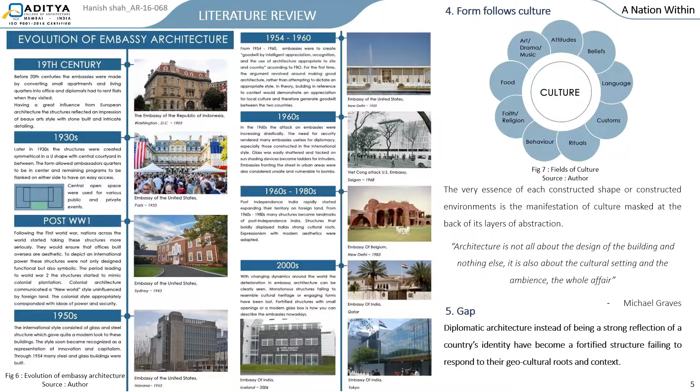Case studies were done to understand the functioning of these diplomatic structures and how they can create a dialogue between the host as well as the native nation.

For example, the Embassy of the Netherlands, designed by architect Rem Koolhaas, used the history of Berlin to create a dialogue between the built form and the context. The Embassy of Belgium, designed by a sculptor rather than an architect, treated the diplomatic structure as a monument rather than a formal structure. The Embassy of Finland used the geographical location of the nation to create a meaningful design.

The Embassy of India in Malé was studied to understand how the residential and chancery blocks are interdependent and function cohesively together.

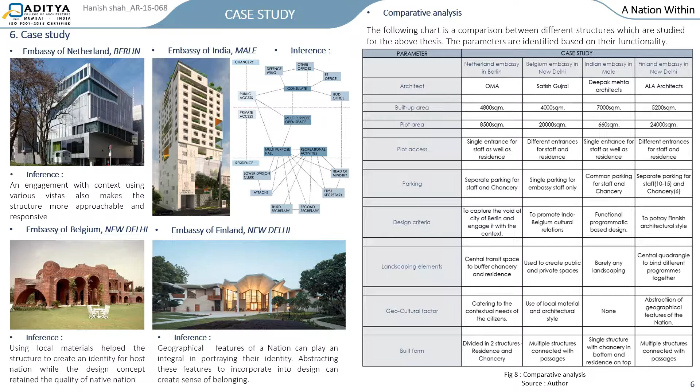The site was selected considering the new budget released in 2019, which suggested the construction of many new embassies. Further shortlisting was done considering a country with rich historical, cultural, and economic ties with India.

My proposed site is in Jeddah, Saudi Arabia. The reasons for this site selection were the Islamic religion, one of the most important religions in India, the huge influx of people traveling from India to Saudi Arabia, and the revised Middle East policies.

My major stakeholders were Indian diplomats who are going to stay there, visitors who are going to actually use that space, and citizens who will be onlookers visually experiencing the space.

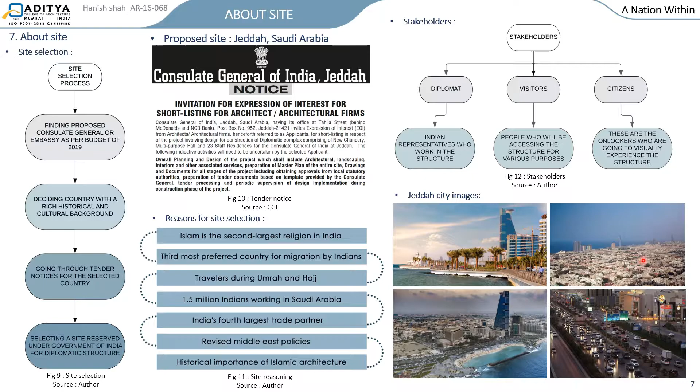The Jeddah city images show that along the west coast there are mostly high-rise structures, while once you come to the core, most of the structures are low-rise.

Jeddah is situated right next to the Red Sea, and hence the climatic condition in Jeddah is not as extreme as the rest of Saudi Arabia.

My site is situated in the residential zone of Jeddah, in proximity to the main airport and the main dockyard. The climatic zone in Jeddah is tropical arid, and the hemisphere is northern.

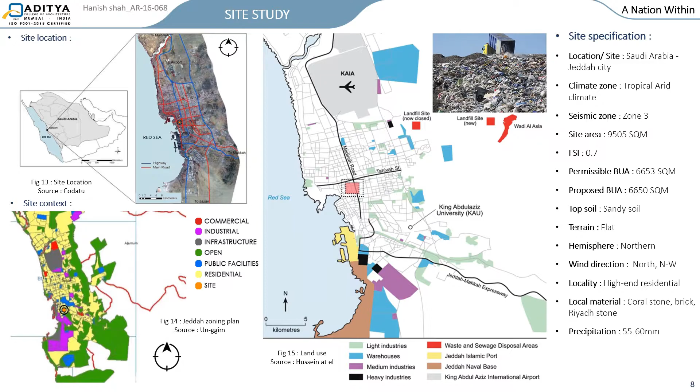My plot is reserved under Government of India for designing an Indian Consulate General. The area of my site is 9,506 square meters and it's almost squarish in shape.

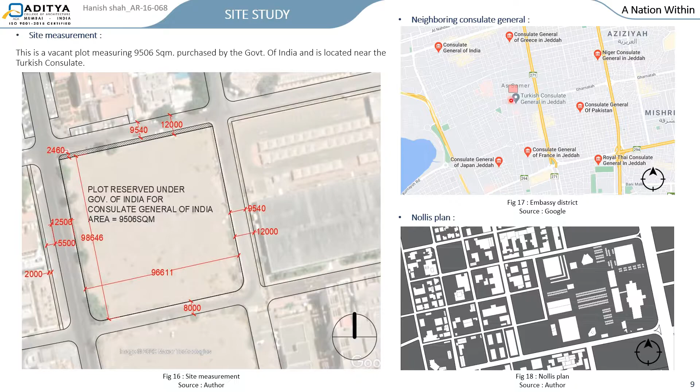It has roads on all four sides and is situated in the Embassy district of Jeddah. The Turkish Consulate General is at the closest proximity from the site. Majority of people access my structure via the main highway, denoted in red. Considering the road hierarchy, the road along the west of my plot becomes the main access road.

In context, the north and northwestern side majorly consists of residential zone, while the east consists of office buildings, and the plot right next to my plot is an open space. On the south is my Turkish Consulate General, which can be seen from my site.

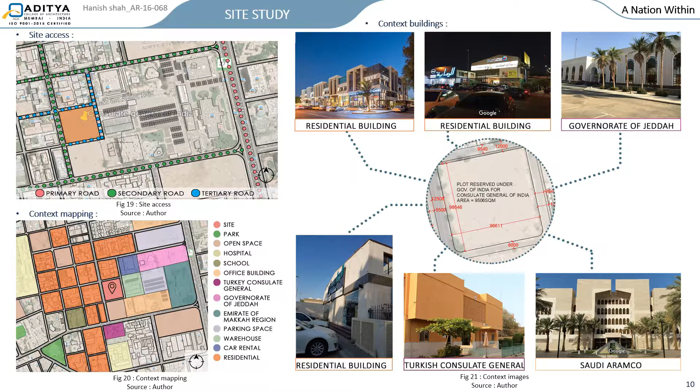As seen in the context images, majority of my structures are G+2 and G+3, all in a beige tone. Due to the height restriction, my viewport is restricted within my immediate context only. The site is devoid of any existing vegetation. A material study was done to understand and create a more contextual and sustainable design.

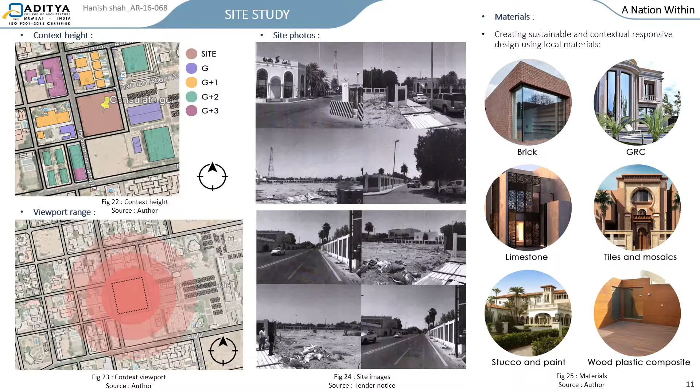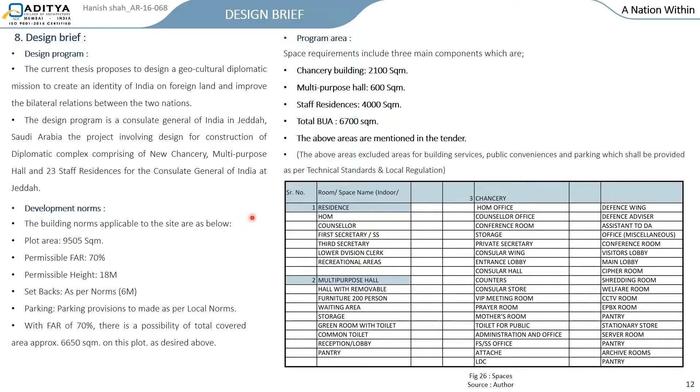Now, coming to design. As I wanted to create a geocultural design reflecting a nation's identity, I started thinking about how people actually perceive India. That's why I stumbled upon the identity of tourist paradise, which India was given because of its magnificent beauty.

The idea was to capture this beauty, this paradise, into a built form by conceptualizing the peacock, which is the national bird of India and also one of the most beautiful birds in the world. In Islamic culture, peacocks are known as the guardian of paradise.

Below are my abstractions from the peacock, and the last one is an abstraction in a planning way, done by conceptualizing the feather of a peacock.

Then I started thinking about how I wanted my context to perceive my built form. India, which believes in mutual harmony rather than dominating, I wanted my built form to complement the context rather than overwhelm it. I started differentiating between Indian and Islamic architecture using the play of arches.

Indian arches are usually semicircular, while Islamic arches are usually pointed. As I wanted to create a more engaging design, I still had to use passive strategies to create a secure design. Hence all the accesses are placed indirectly so a person can't directly rush in.

The water bodies were placed strategically to funnel and restrict people's movement. The facade was designed such that less surface is exposed to attack. The chancery was placed away from the main road so a person can't attack it. There are receding terraces in the office to have a visual buffer.

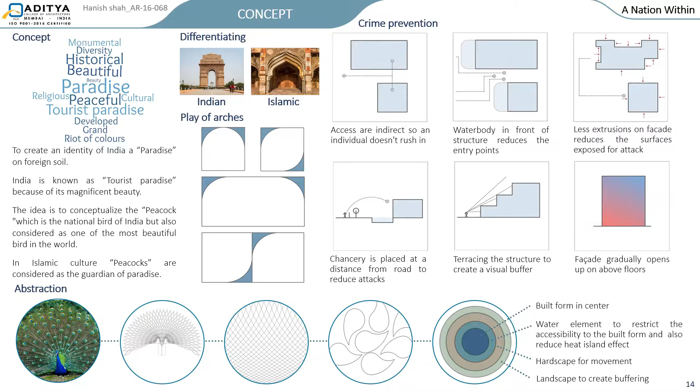The facade was designed such that it is dense at the bottom while it opens up going up. The motion graphic below shows how my design has been derived.

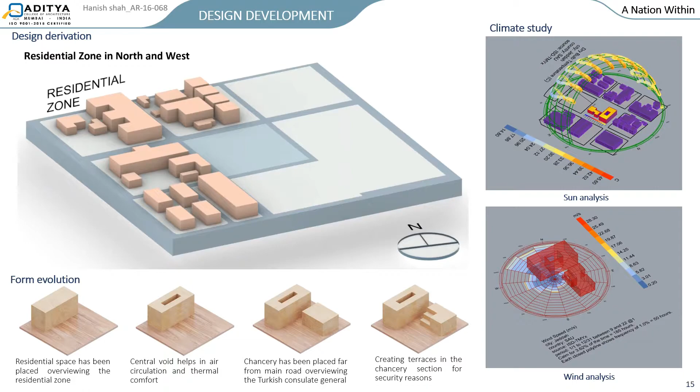My site has roads on all four sides, and these two are my main roads. The residential zone is in the north and west, the commercial zone is in the northeast and east, and the Turkish Consulate General is in the south.

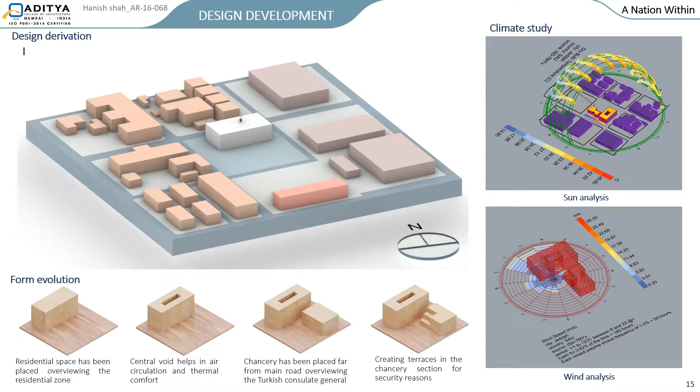My residential block has been placed such that it overviews the residential zone. The central void was done to have better air circulation and thermal comfort. The Chancery block overviews the Turkish Consulate General to create a dialogue between the two.

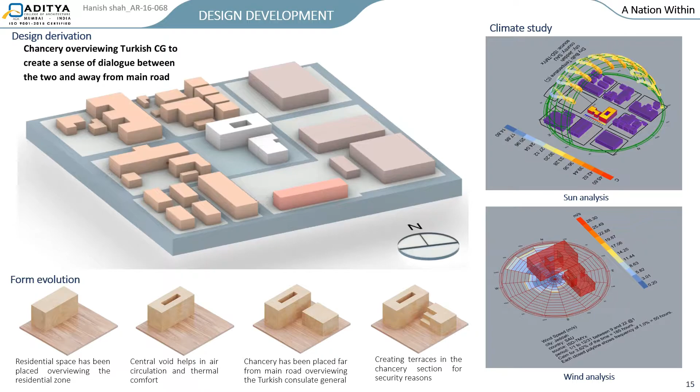The receding terraces create a visual buffer. The central driveway separates the two spaces. The bridge connects the residential and Chancery block. The landscape was placed in the front side while parking is in the rear side, with the water body used to restrict movement and create thermal comfort.

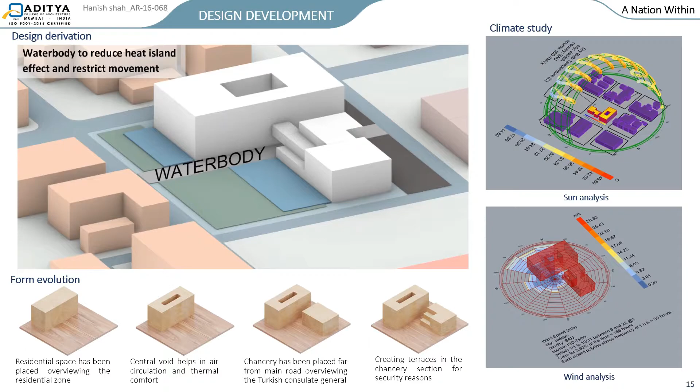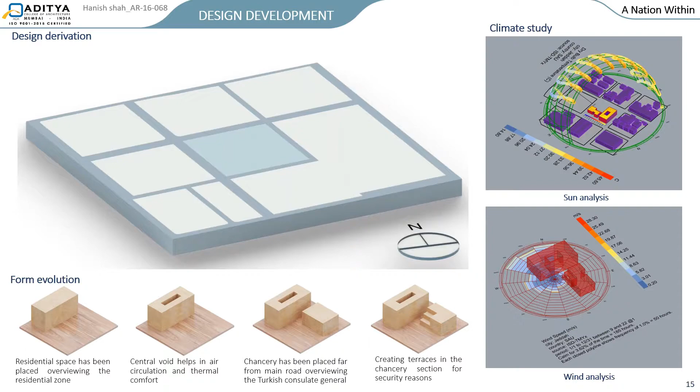As seen in my climate study, the residential block has been placed such that it receives more passive light and the longer facade faces the dominating wind direction. A is my Chancery block and B is my residential block.

My residential block is further divided into wing 1, for the higher diplomats, and wing 2, for the lower diplomats. Even though they are internally separated, the idea was to portray them as a single entity, and hence the residential block looks like a single entity to the outside world.

As you can see, all my entrances are placed indirect to the main road. Now the pedestrian entrance opens up in the landscape patch, which can function independently without hindering the flow of design. The water body has been placed strategically to create a reflection and make the structure look more grand, and also restrict the movement of people. The landscape patch in front of residents is used privately just by the residents.

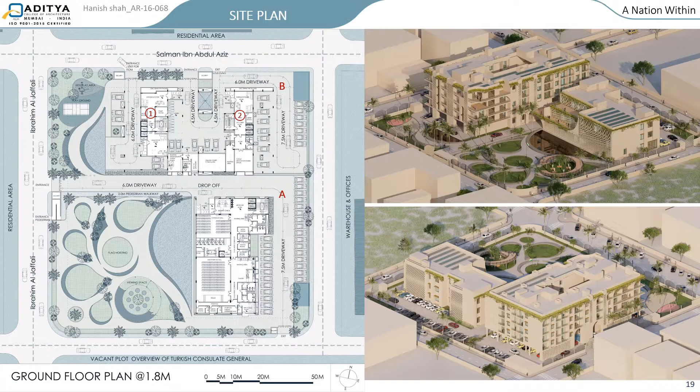While Multipurpose Hall, which is a double-height space, is used during different occasions and is used by diplomats, their families, and the rest of the people working in the office. So hence it has been placed later on. Both Multipurpose Hall and Consular Hall have been placed on the front facade overviewing the landscape area, while all the auxiliary programs are placed on the rear side.

The floor height for Chancery is 4.2 meters. Coming to the first floor, this is the floor where resident and Chancery meet, so this is the entrance spot. Hence the HOM office and vice HOM office have been placed over here for easy access. The terrace is accessed from the bridge outside.

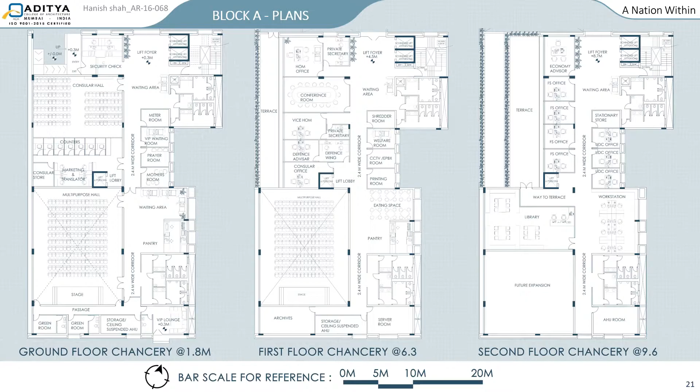Coming to the top floor, the top floor consists of other office spaces required in a chancery. The future expansion space is a space where the rooms are constructed on site due to security issues. As you can see, cavity wall has been used in many places to reduce the structural heating.

The rear side of my residential consists of recreational spaces which can be accessed from outside. There is a way which leads you to the chancery from the ground floor. The massing shows the distribution of spaces vertically and how they are interdependent.

Coming to the first floor, this is the floor which connects to the chancery. So the idea is that the Indian diplomat need not go to the ground floor to access his or her office, so they can access it via this floor. There is a gathering space provided in the center which can be accessed from both the wings.

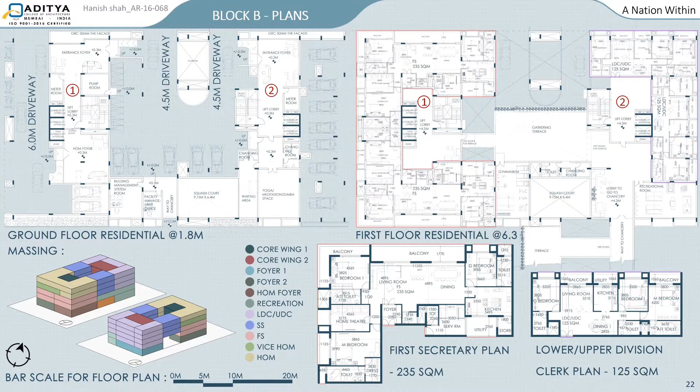Wing 2 has the same floor plan from second floor till the top floor, while the third floor plan for Wing 1 is now divided into Vice HOM and HOM plan. HOM has a duplex plan in which the below floor consists of public spaces such as dining for 30 persons and a party terrace, while the above floor is a private floor for HOM. There is an internal staircase which leads you to the top floor.

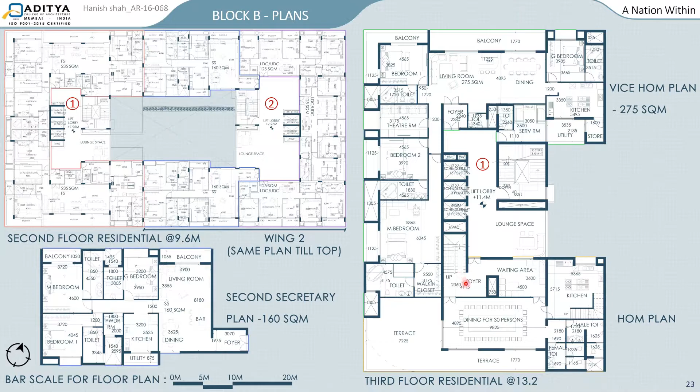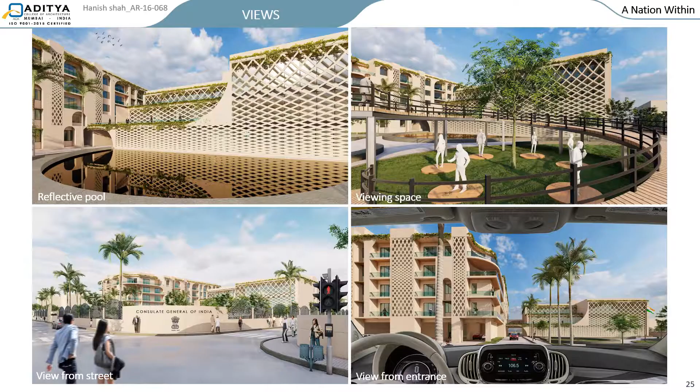This is the view of the reflective pool which gives a sense of grandness to the structure. This is the view from the street turning, and this is the view from the entrance when someone comes in the car.

As you can see, the facade has been adopted from the identity of a peacock and is dense on the ground floor and opens up going up.

The play of arches has been used to create a rhythm between both the built forms to make them look like a similar structure. The external finish is Riyadh stone, a locally quarried stone in Saudi Arabia. The facade is a GRC panel.

The landscape vegetation is usually acacia, which doesn't require much maintenance and doesn't require much water.

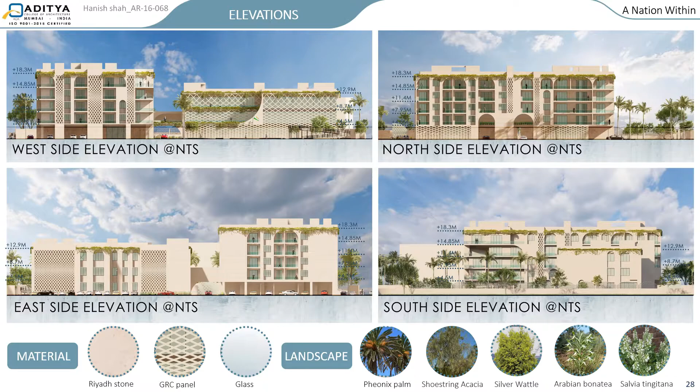Coming to the services, the substation has been provided right next to the main road and is further connected to the electric meter room. The DG set has been provided right next to the substation.

The UGT for residential is divided into two OHTs for each wing respectively. A separate UGT is provided for the Chancery, which connects to the OHT. The IC chambers are connected to the package STP, which is situated in the southeast.

Because of the dominating wind direction coming from the northwest, the foul smell won't enter the site. Organic waste has also been provided right next to it.

A VRV outdoor HVAC system has been used, and hence outdoor unit space has been provided on the terrace. A balancing tank has been provided for the overflow of the water body, and during rainy season these act as a catchment area connected to the rainwater tank.

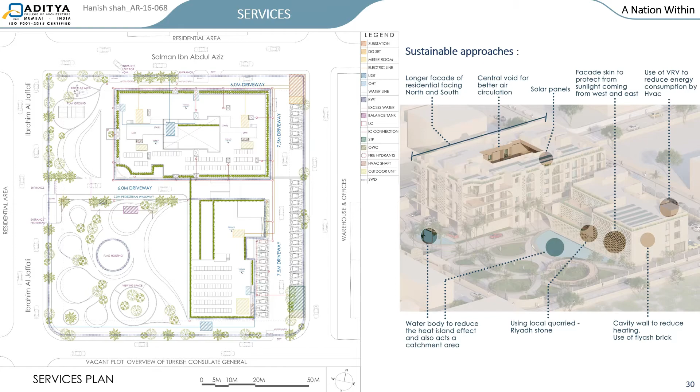As you can see on the right, these are the sustainable approaches used in the design.

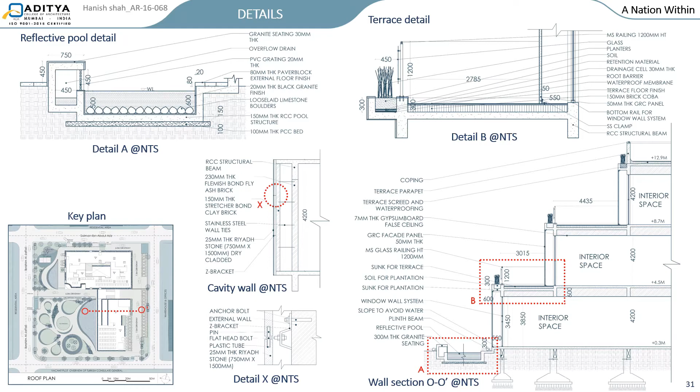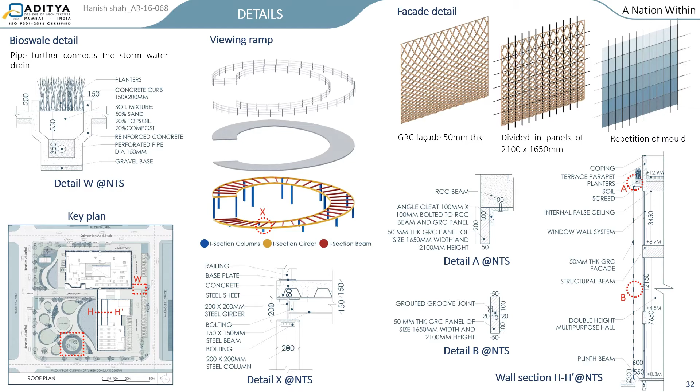So now I would like to present a small walkthrough.